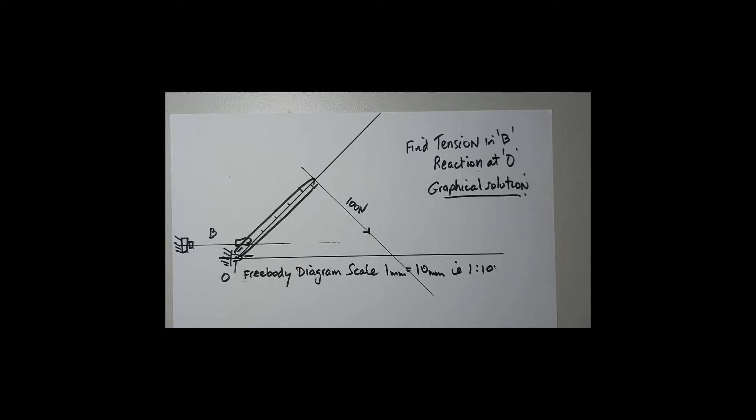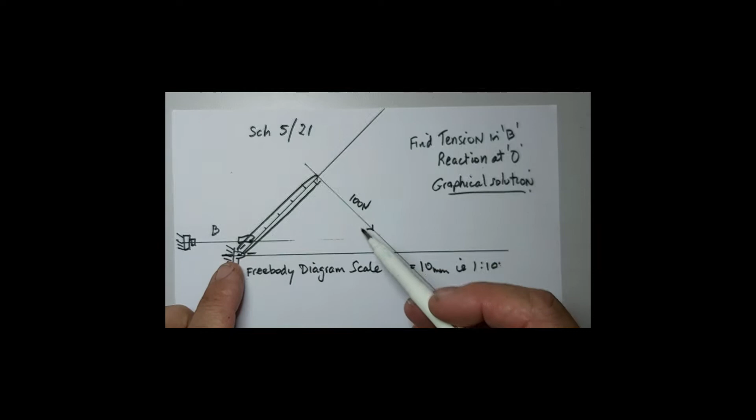We have a lever arm here which is pivoting about at point O, and it has a cable attached to it. And this question comes from Schlenker, chapter 5, and it's number 21. Okay, so it's pivoting about point O, it's a lever, and it has a force of 100 newtons being applied at right angles to the lever, has a tension in a cable at B which is horizontal to the ground, and we're being asked to find out what is the tension in the cable and what is the reaction that's happening here. So it's going to be a reaction.

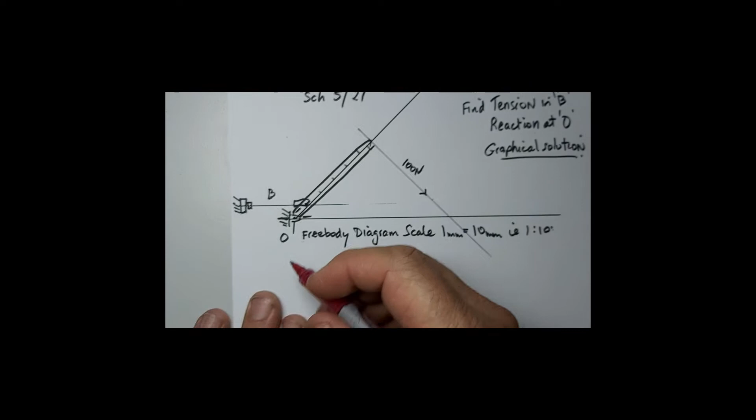I'm going to draw that in red over here. So there'll be a reaction, and we don't know quite what angle it's going to be, and I'm going to call the reaction RO. I'm going to call the tension in the cable TB, tension at B. All right. Now, we do know some things. We know the angle, the line of action of the force, and we know the magnitude of the force. We know its point of application and its sense, the 100 newton force. We know everything about that force.

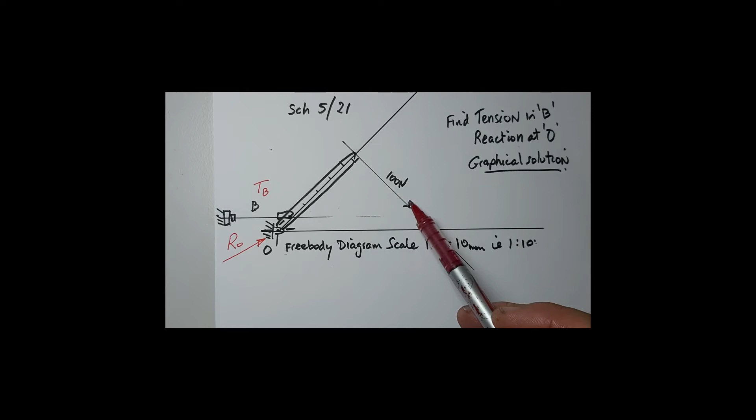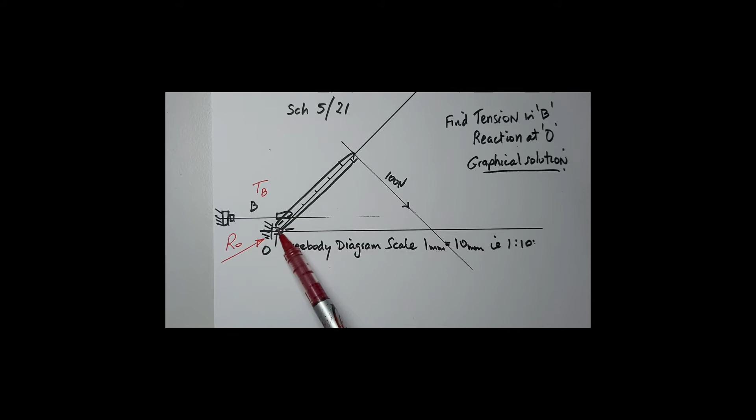We know the line of action of TB. It's going to be horizontal because that's a sliding pin over here, and no matter where we pull the lever, the force will always be horizontal. We don't know anything about the magnitude or the reaction at O, except that we know that it must travel through that point. So the force has to go through that pivot point. This is a classic three-force rule. There's only three forces acting here. Tension at B, the applied force 100 newtons through the top of the lever, and the reaction at O. So we know that all three of these forces must be concurrent.

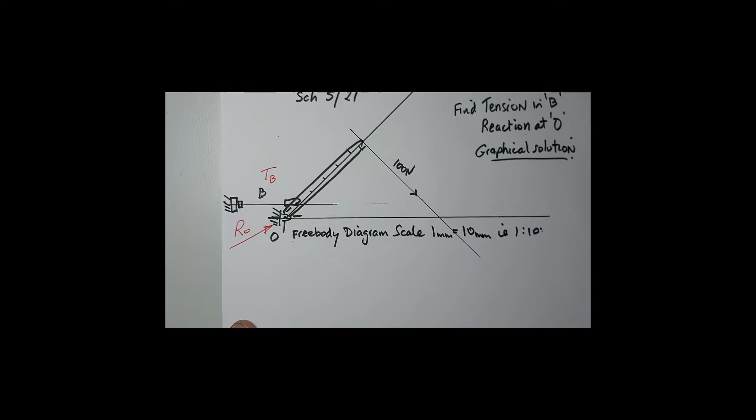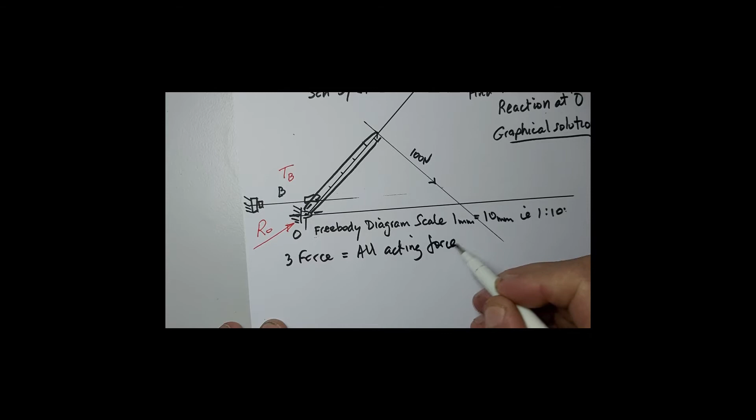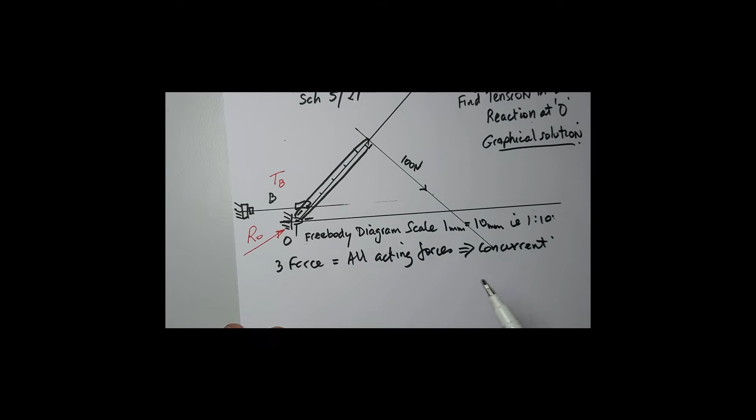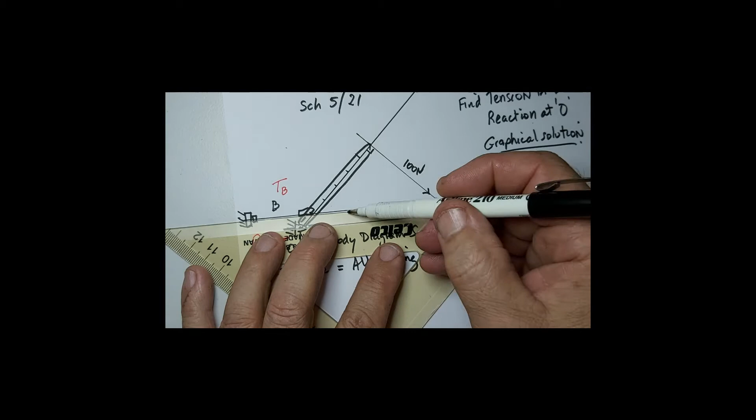So the three-force rule says that all acting forces on an object, if there's only three of them, must be concurrent, which means all passing through the same point. Now the question is, where will that point be? Well, to find that out, let's see where this force intersects with the force that we know all about, the 100 newton force, and it's going to intersect exactly at that point there.

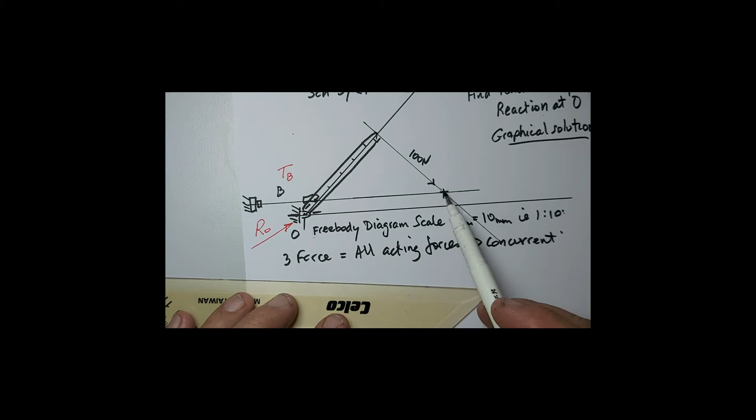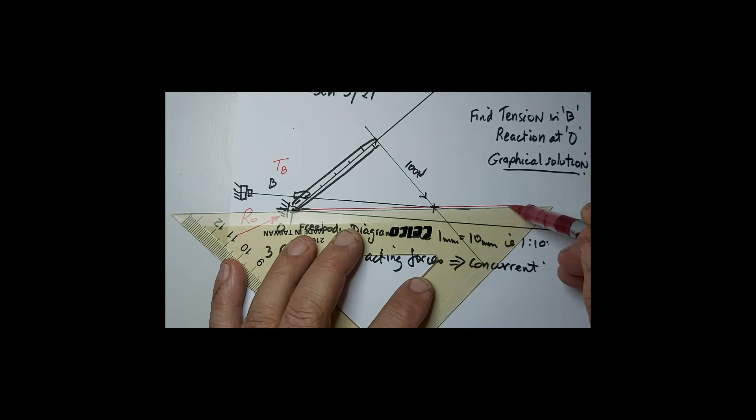Now that's very useful for us because we know that the reaction at O has to travel through the pin because that's where it's being applied to the lever, but it also has to go through that point because that's the point of intersection of the other two forces. And if all three forces are going to be concurrent, all three will have to go through that point. So we can now determine the angle or the direction of the reaction at O. It's going to go through that point O, and it's going to go through the intersection of the other two forces on their lines of action. Now that's very useful because that gives us the angle of application of RO.

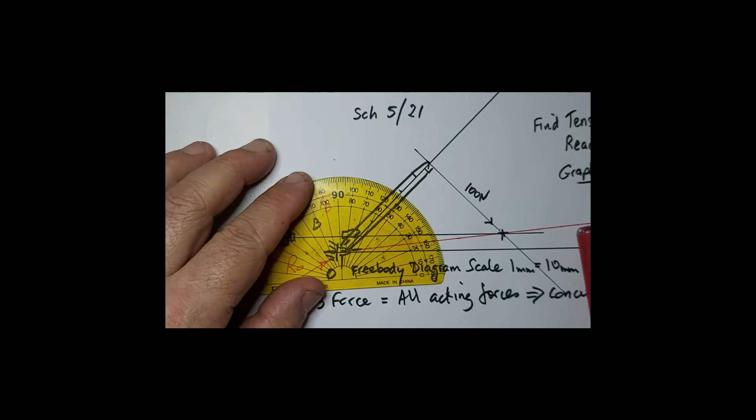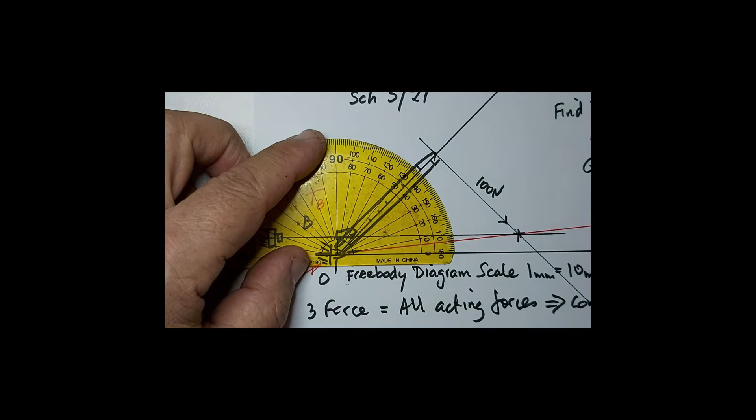And with the protractor, now I should be able to work that out. So let's line the protractor up. Now the accuracy of your answer is going to depend largely on how accurately you measure and you plot things. Now looking at that, it looks like it's pretty close to 5 degrees, maybe just a bit. I'm going to go with 5 because 5 is the actual right answer and it's going to give us a better result. But if you put 5.5, it won't matter. The thickness of your lines can make a huge difference. So we'll say that's 5 degrees.

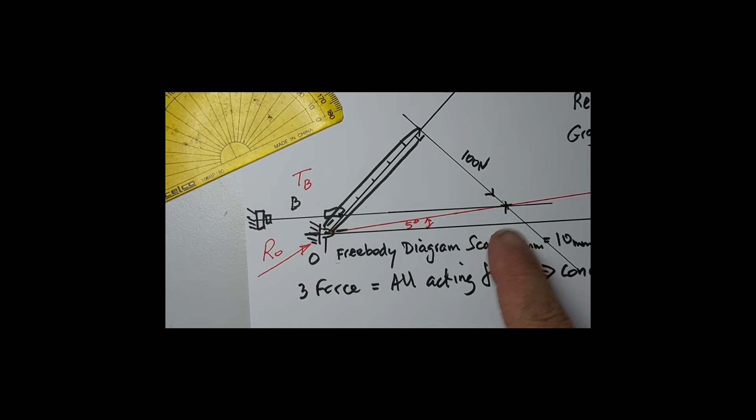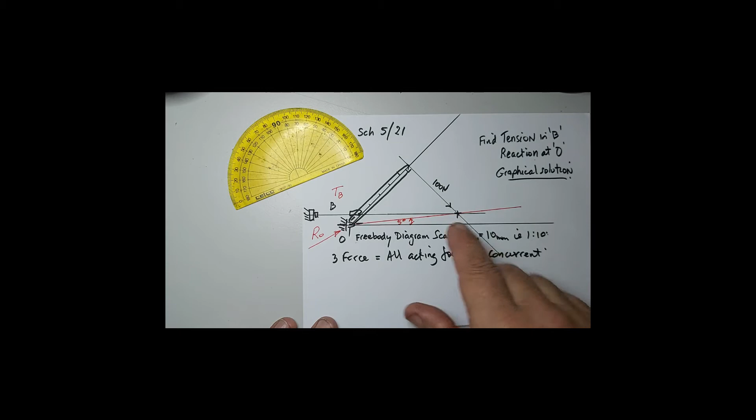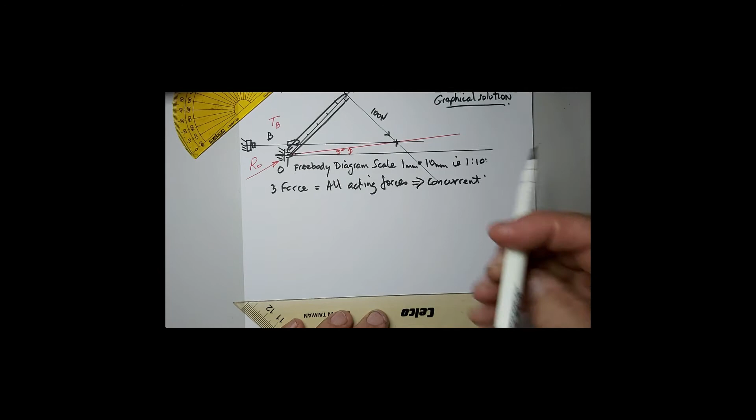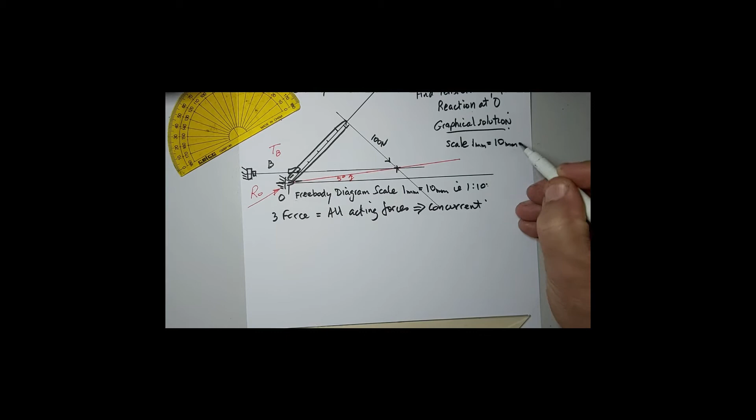Now, having said all that, we're now going to plot a different diagram using just forces. Now, if you've done this diagram accurately, you can actually use your free body diagram, your space diagram, to plot your forces. If you haven't done it accurately, you can start again. I'll start again just to give you a bit of an idea so that you can find it easy to do. Now, in plotting this diagram, my first diagram, I had a scale. It's very important that you draw your diagrams to scale if you're going to use graphical solutions. So my scale for that diagram was 1 millimeter on my diagram is 10 millimeters on the actual mechanical system. Therefore, my scale was 1 to 10.

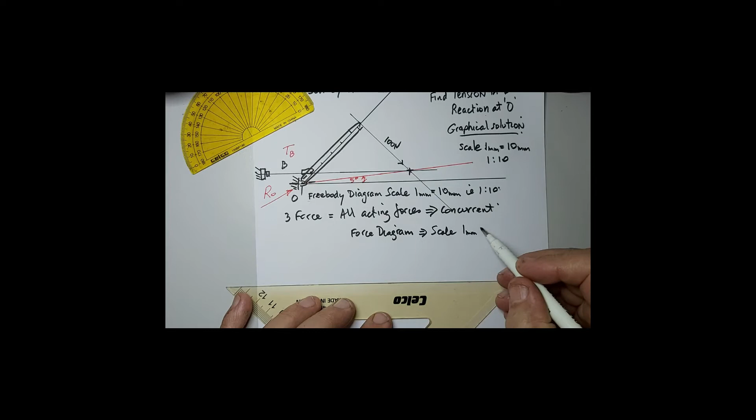Now, I'm going to draw my force diagram. I'm going to use a different scale because I happen to know that this is going to produce, actually, I might use a very similar scale. My scale will be 1 millimeter on my drawing is going to equal 10 newtons of force. Very important when we come to calibrating our results. Okay, so let's travel a bit further down here now and start setting up our diagram.

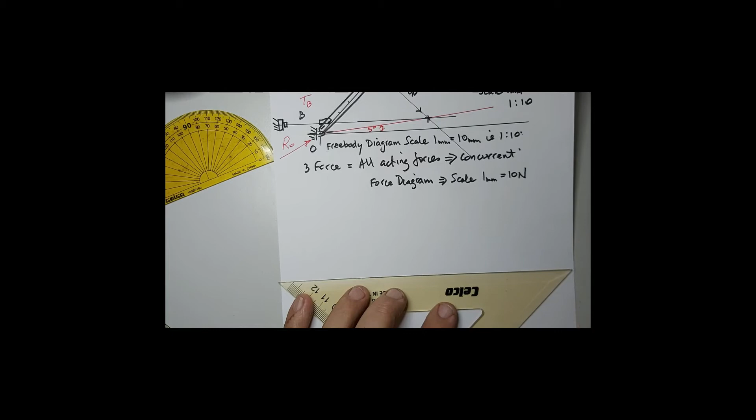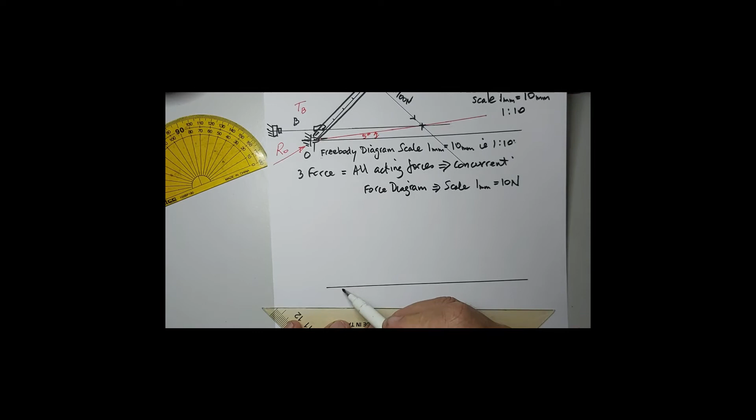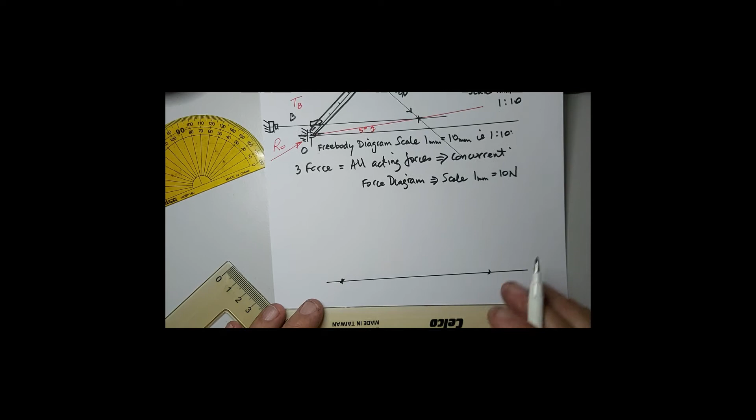Now I'm going to use a thick pen, but you would normally use quite a thin pen to get more accuracy. Start with the baseline. There's my baseline. And over here, I'm going to plot my point, and I'm going to make my reaction another point actually right over here. I'm going to change that. So I want now 45 degrees coming out. Now I can use a protractor if I wanted to produce my 45 degree angle. I could line it up there at 45 degrees, which will be here.

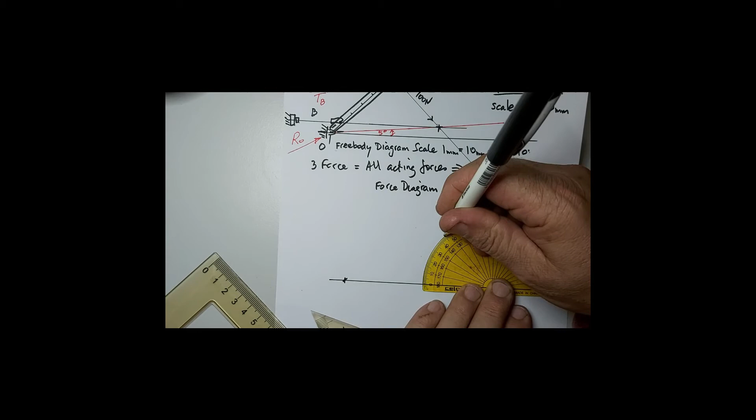Or I could grab my 45 degree set square like I have here, and I could say, all right, there's my baseline. I'll line up the bottom set square, which is a 30 on the baseline, and just move my 45 degree backwards and forwards until I can line it up with my dot. Like this. Either way will produce a result that we want.

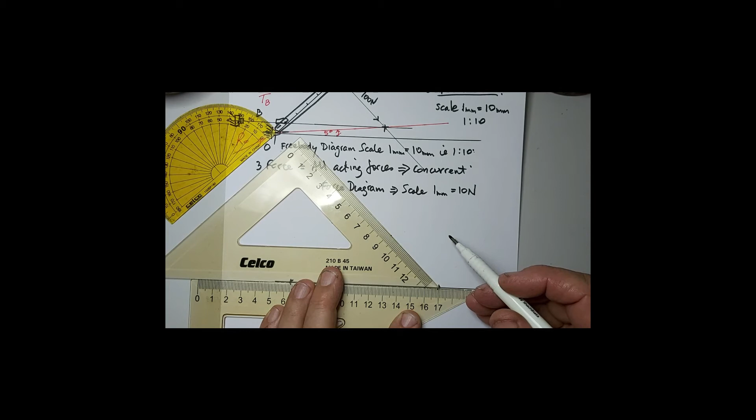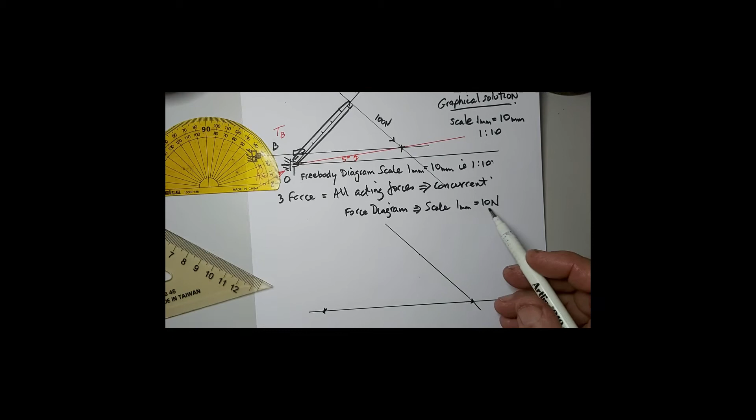So there's the line of action of my 100 newton force. It's going to go through here. Now, according to my scale, 1 millimeter is 10 newtons. So 100 newtons is 10 millimeters. So if I measure very carefully, and again, your accuracy will be important here. I'm using a thick pen, which is not ideal, but at least it helps you see what I'm doing.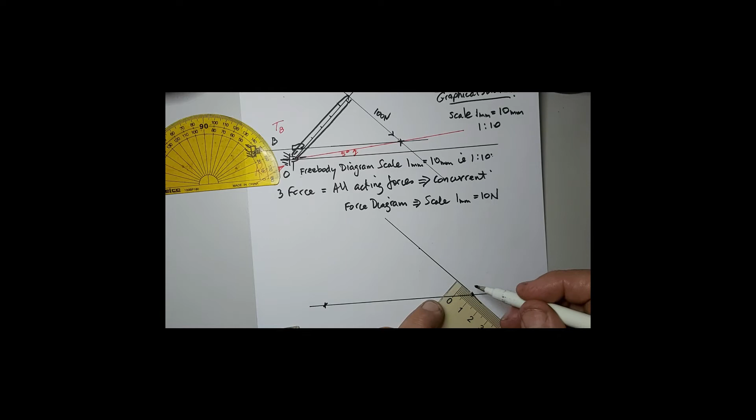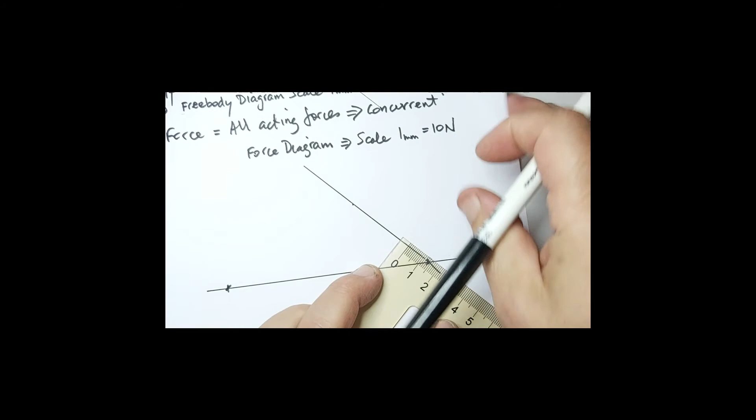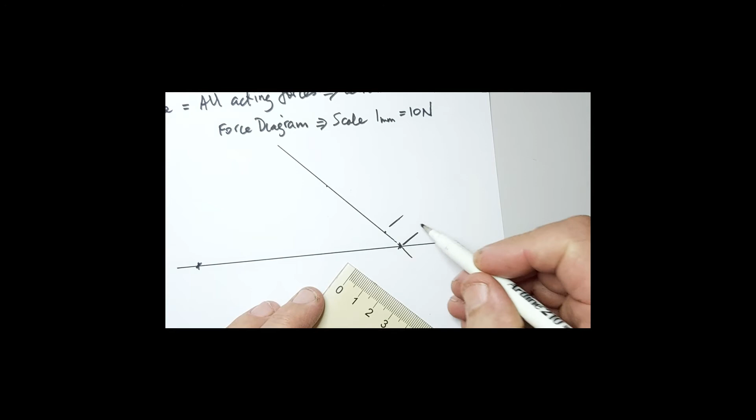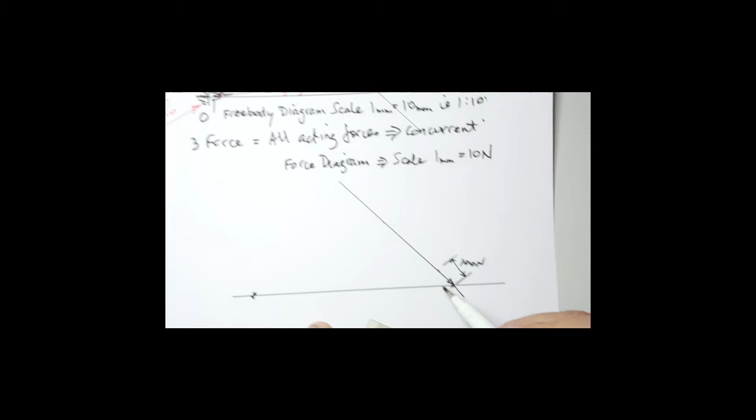So I'm measuring up here. Make it a little bit larger for you. 10 millimeters to there. So that distance there is the equivalent of my 100 newtons force. Now, the next thing I know is, so I have that force acting downwards like this. There's my arrowhead.

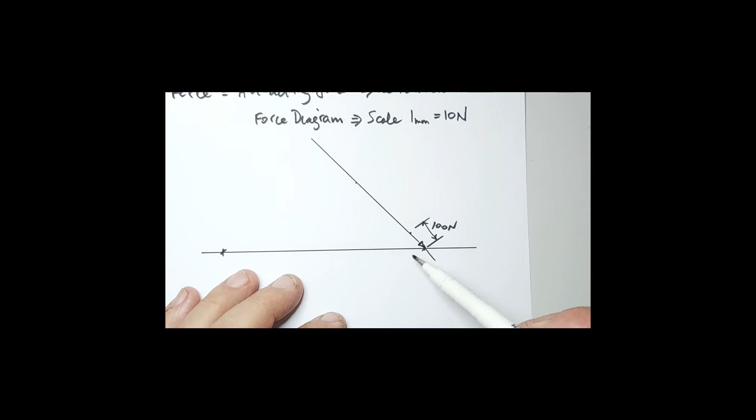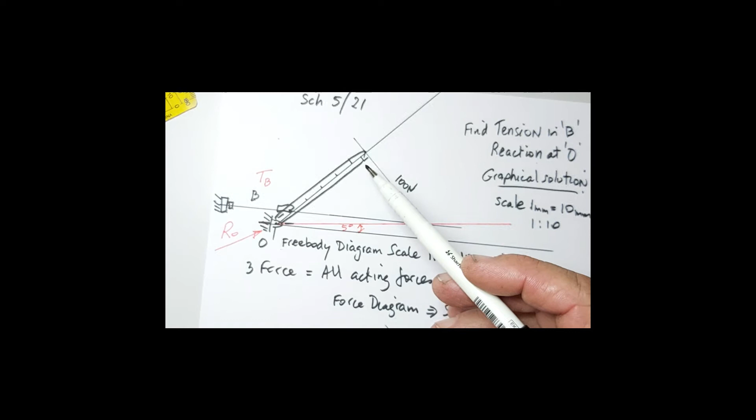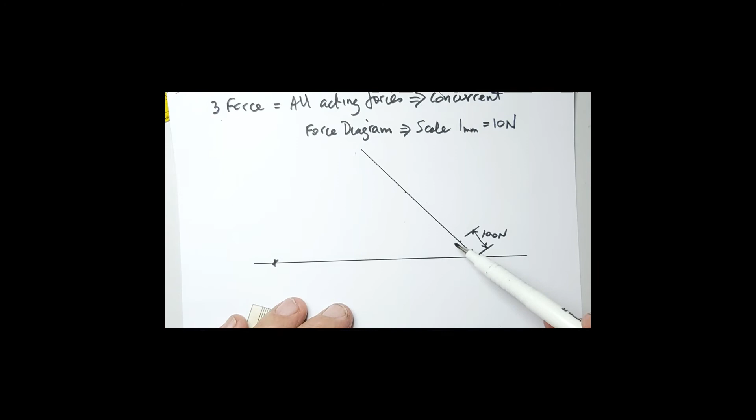The other thing that I know is that I have another force which is going to be a horizontal force. Now, if all the vectors added head to tail end up forming a closed diagram, that means that the object's in equilibrium because all the forces are going to balance. And that's the case. This system over here is in equilibrium. You're pulling the lever, you're presuming it's not moving, all the forces are balanced, and they're stationary. So if that's the case, then all of the vectors have to add head to tail, and I have to have a horizontal vector because that's my force at B.

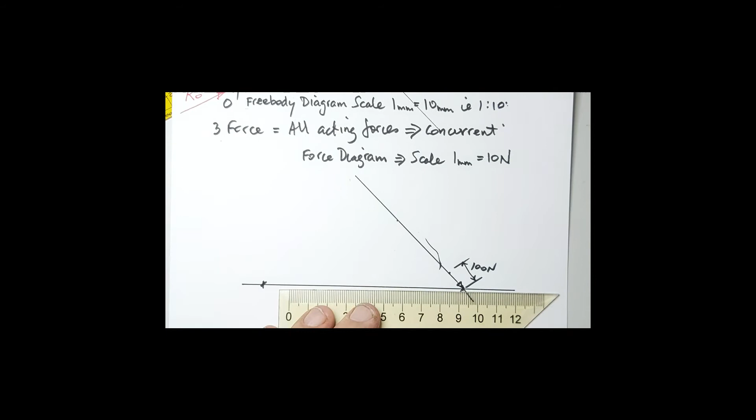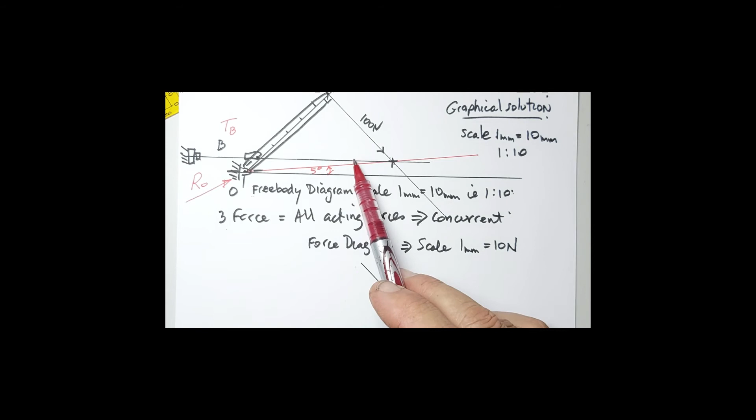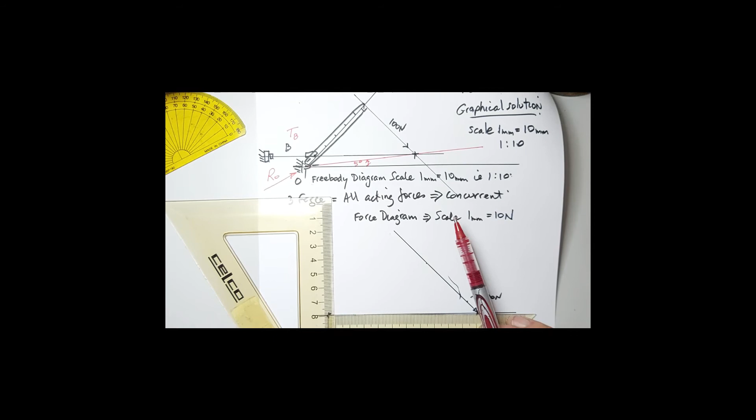So I'm going to make the horizontal vector down the bottom here. Now that's its line of action, but I don't know how long it is. So how can I determine? Well, I have another force here which is acting at 5 degrees to the horizontal upwards, which means that angle there will also be 5 degrees. So if I create myself, and I'll drop out of here so you can see, a parallel reference line, so I can create a nice 5 degree line coming from the base of my, there it is.

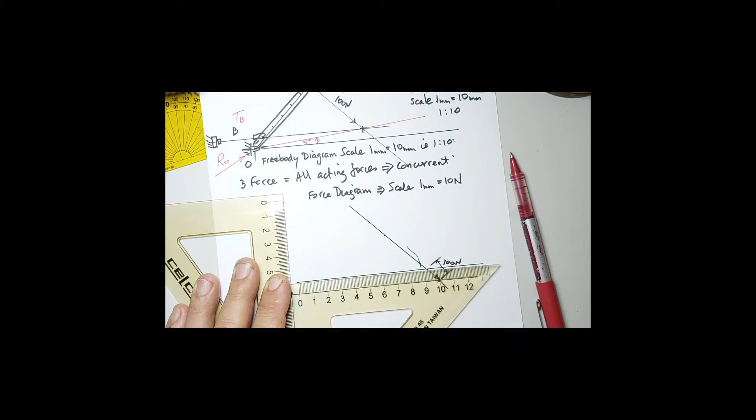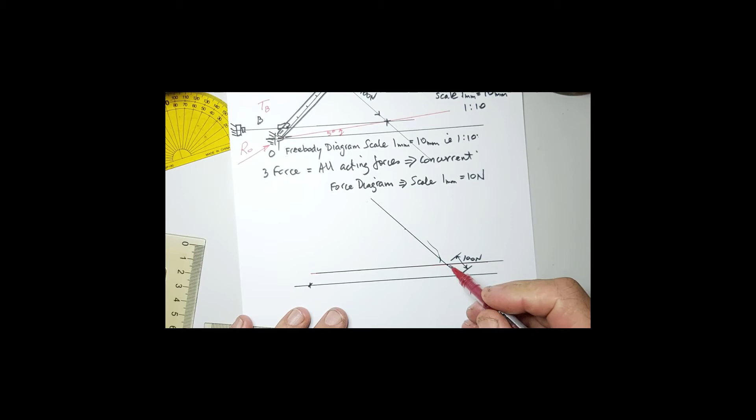So there's the base. It's not a very straight line, is it? Yeah, and even by eye I can see that that's not very straight. Let me line it up a little bit better. That's better. I'll use this pen. Okay, so there's my reference point here. Now from here, I want to produce a line that drops down by 6 degrees to represent the vector, or 5 degrees, didn't I? I said 5 degrees up here. 5 degrees.

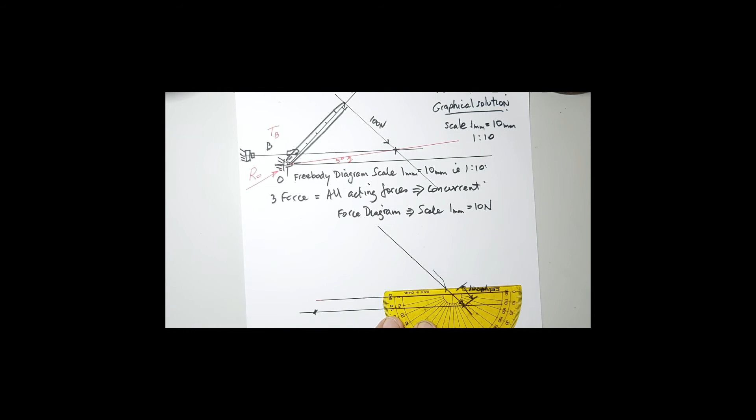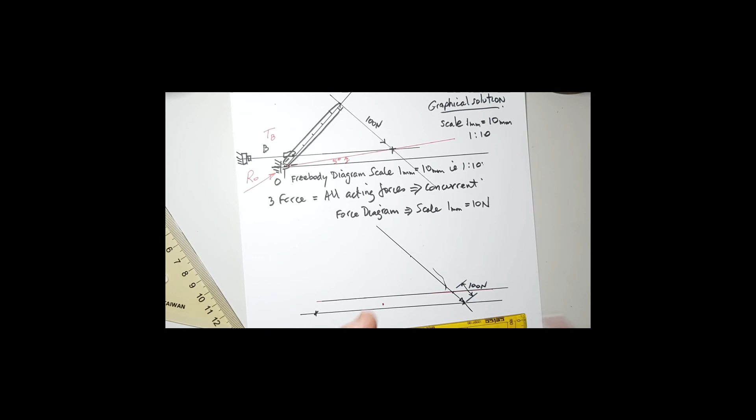So I grab my line and I find my 5 degree point. There it is, right there. And now I'm going to create a line that's going to go through the base of my 100 newton vector, and it's going to intersect this other vector, the horizontal vector, like that. Okay, so 100 newtons here, and my point of intersection is going to be just about, I'd say here.

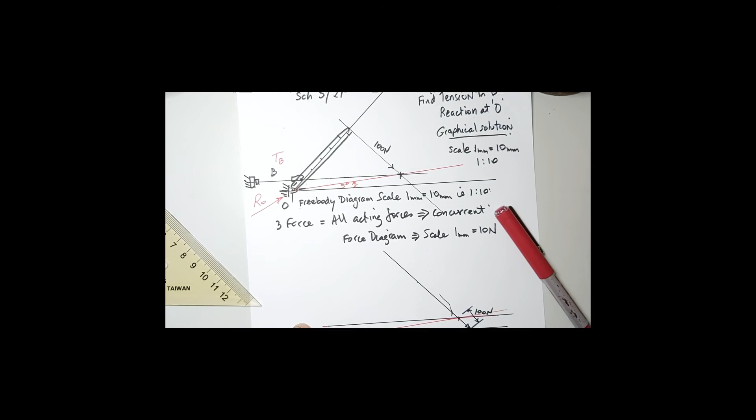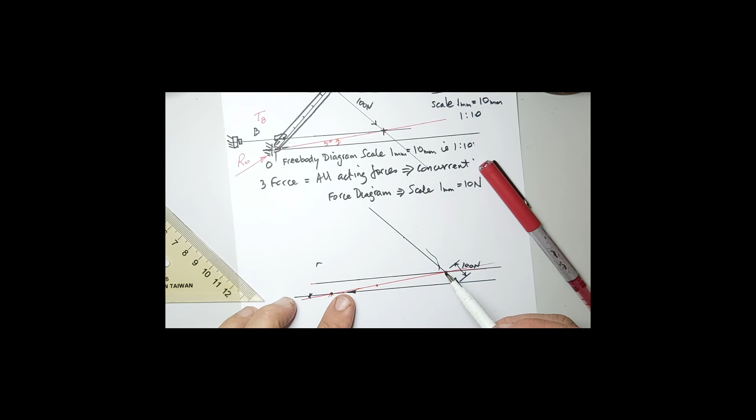Now, I know that my horizontal vector, my tension's pulling in that direction. So the arrowhead of my horizontal vector will be coming in that direction to there. This force, on the other hand, the reaction force, is going to be pushing back, and it needs to push back in order for the force diagram to close. So this will be the direction of my resultant vector. So that will be RO from here to here, and this will be TB from the point of the 100 all the way to the end.

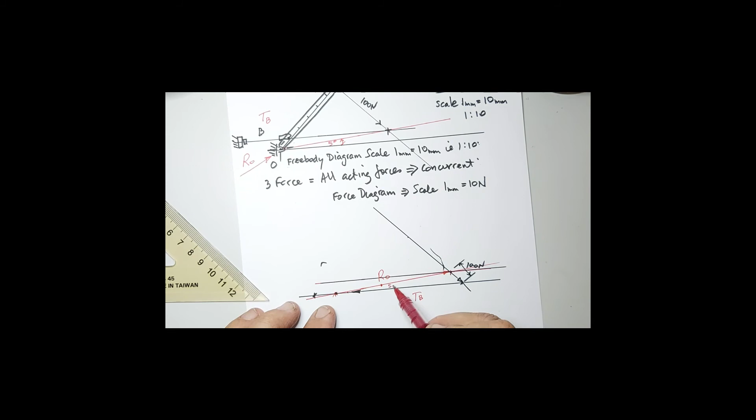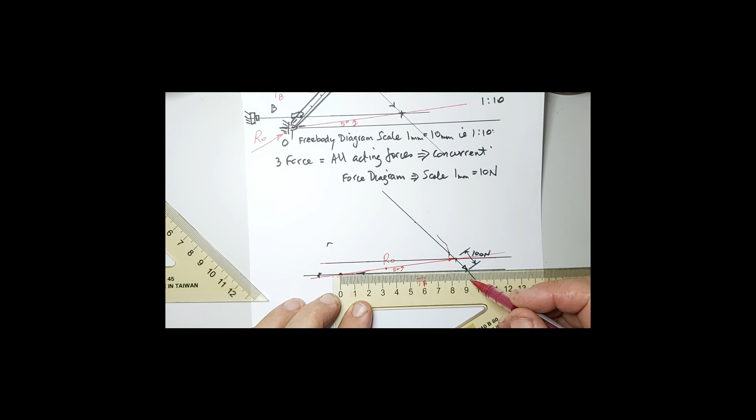So what are their values now? I know that this is 5 degrees, that angle. What are the magnitudes of the vectors? Well, I only need to measure them now. So if I measure and place my ruler on here, measure them nice and carefully, I'm coming up with this distance here being about 92 millimeters. So TB is going to equal 92 millimeters

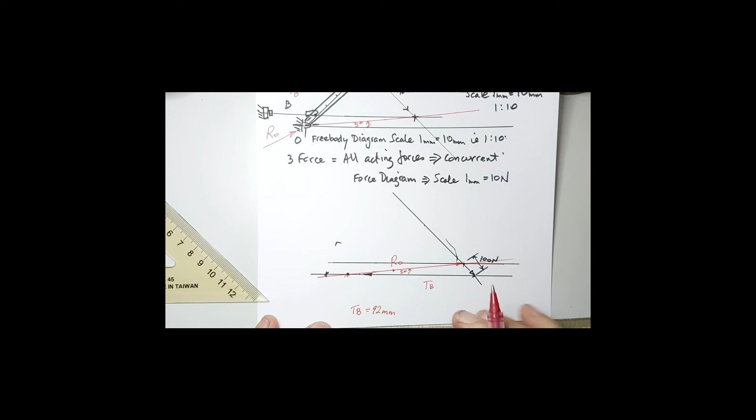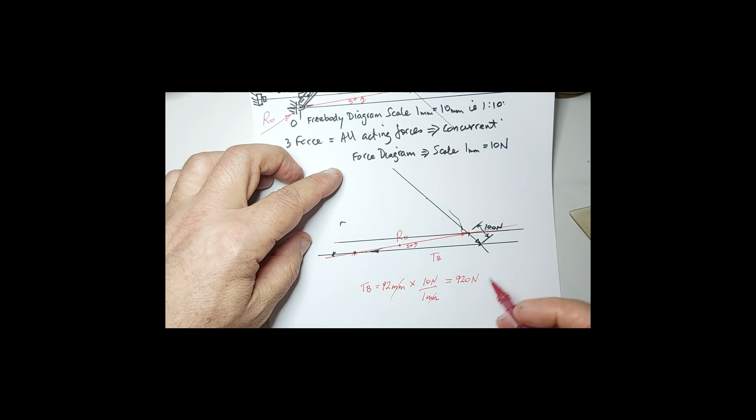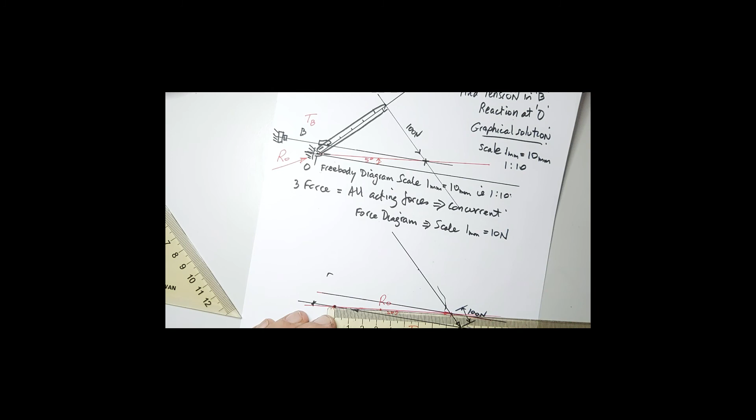multiplied by my scale. My scale is 1 millimeter is 10 newtons. So I'm going to write that as 10 newtons per millimeter. Cross out the millimeters. I'm left with 920 newtons as the force of TB acting horizontally to the right. What about RO? Well, RO, if I measure RO, it looks like it's 82 millimeters. There we are, about 82.

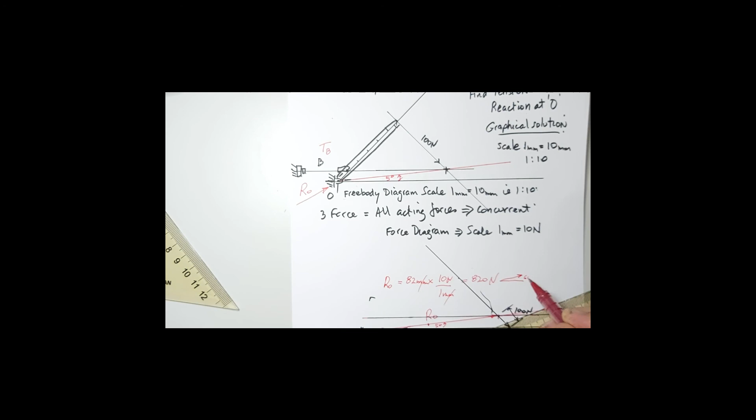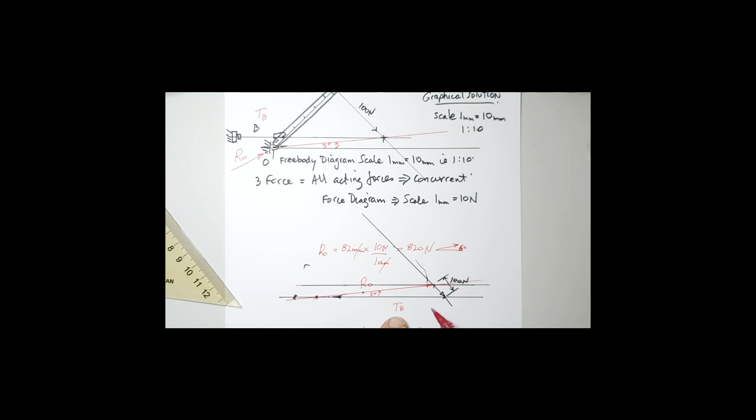So I can say RO is going to equal 82 millimeters multiplied by my scale factor, which is 10 newtons per 1 millimeter. Cross out the millimeters, 820 newtons. And that's going to act at 6 degrees to the horizontal up to the right. So now I've solved graphically for the force, the tension in TB, which is this tension here, and you notice it makes sense. It's because we've got a mechanical advantage over here pulling with that long lever.

We've got a high tension in TB, which is what we'd expect with a brake lever, and it's at 920 newtons for an input of 100 newtons, and I've got a reaction which is pushing up at a shallow angle of 820 newtons from point O. Very useful to know that.

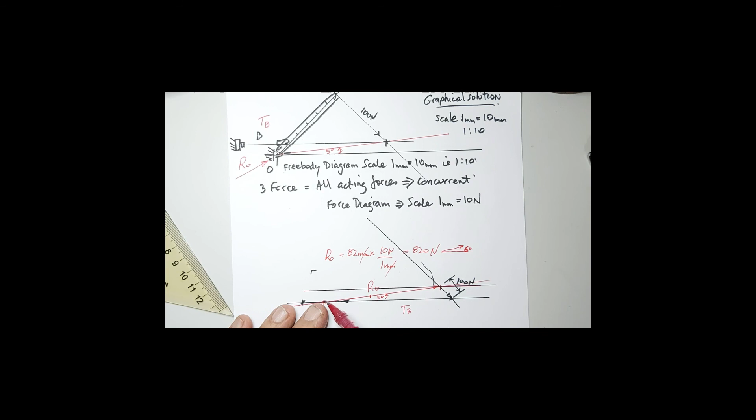So there's the solutions. Now these vary slightly from the actual answers. It would be because the accuracy of my measuring with this thick pen will produce a substantial difference in terms of intersection points here, which then produces different measurements. So accuracy becomes everything when you're doing graphical solutions, but that's the correct method.